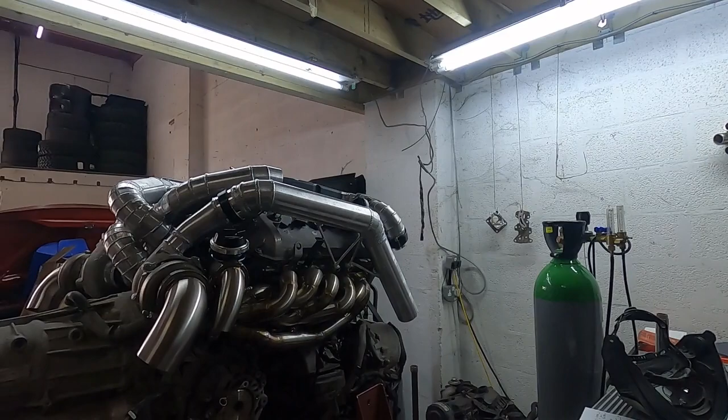This is how big this engine is. In reality, it is huge. It is W12, so it's shorter than the V12, but it's definitely larger. It's just big. Let me just show you from this perspective, maybe. Yeah, it's huge.

Right, so a bit more progress on the Econoline, and oh crap, where's the engine? Yes, it's not here anymore. However, now you can notice roughly how huge this hole is just to put that engine in. And I can tell you right now, this is the minimum. We are actually at the level you see where I cut the floor. It is actually the same level, same height as the chassis rails, and yeah, it barely fits.

This is how big that engine is. Let me show you. Let me just grab my coffee because it's morning and I kind of need it today.

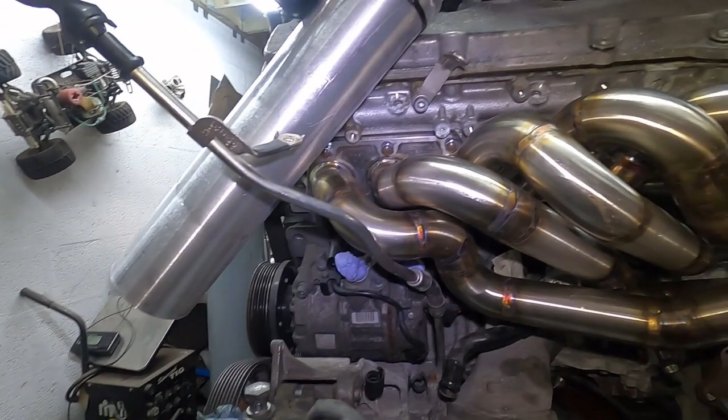Ta-da! It is pretty damn big. Obviously we have to work on the gearbox now. It's gonna be rear-wheel drive, blah blah blah, and yeah, this is how it looks from the outside. Now you can see obviously why all of these bends and all that stuff. This bend here is to allow that fitting over there for the air con compressor fitting, the big one and the small one. So everything now starts making sense.

Wires, twisty stuff, etc. Plus we have access to every single bolt there. You see, you can access them all. And yeah, this is how it looks. I took it out. Let me show you this side. It's a bit easier. This is obviously that cooler we have to remove because there was no space for it. And yeah, this is this marking.

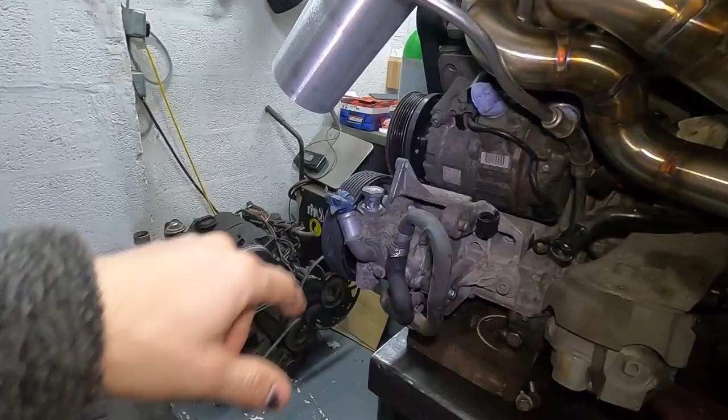It's actually my ramp, because I went, believe it or not, through this space, which was a bit tight. It's a bit of a mark here, a bit of a mark here, but apart from the mark, this is kind of wobbly now. But it went through. As soon as you remove the power steering pump, it went through by millimeters, not even that. So I did remove that. I marked the positions of this where they have to be, and I have to make mounts to support this in place so it doesn't move.

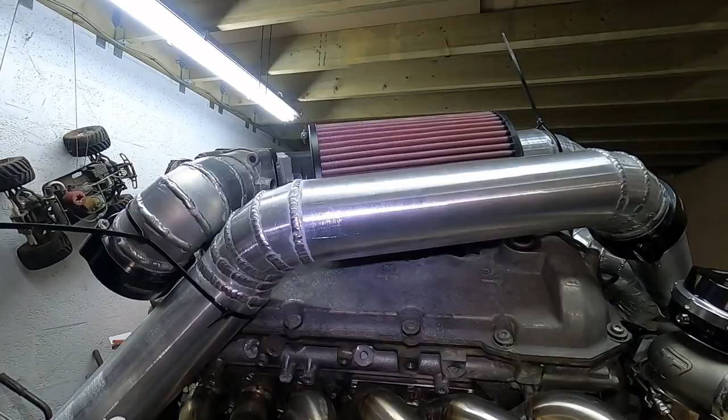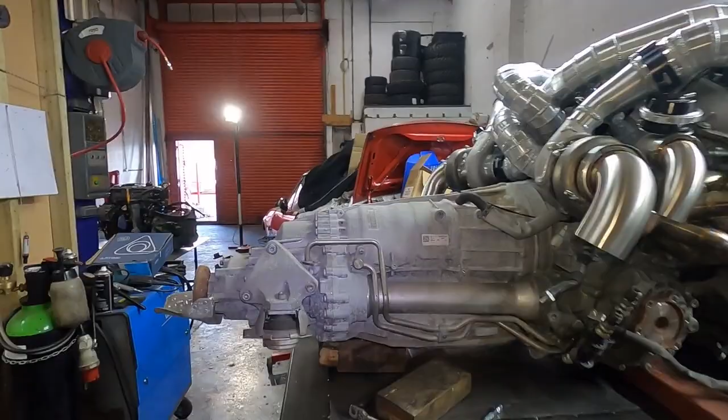But obviously I needed the engine close to the welding station I have over here, or bring my welding machines to the van, which turns out is gonna be almost the same job as bringing the engine here. Plus I need the engine outside anyway because I have to work on the transfer case. This van is not gonna be four-wheel drive, so I don't need the front differential, I don't need the front prop, I don't need the transfer case at all.

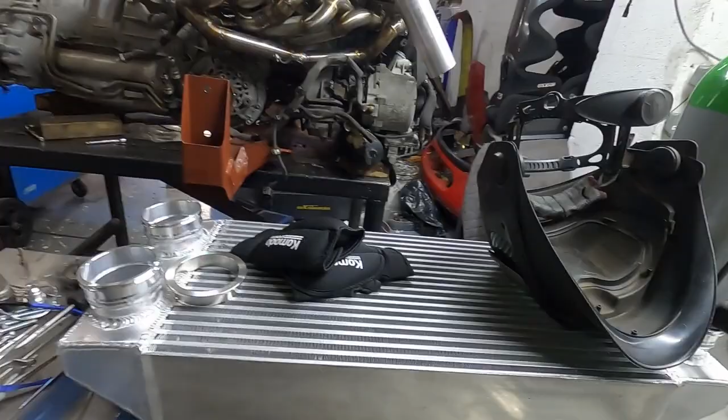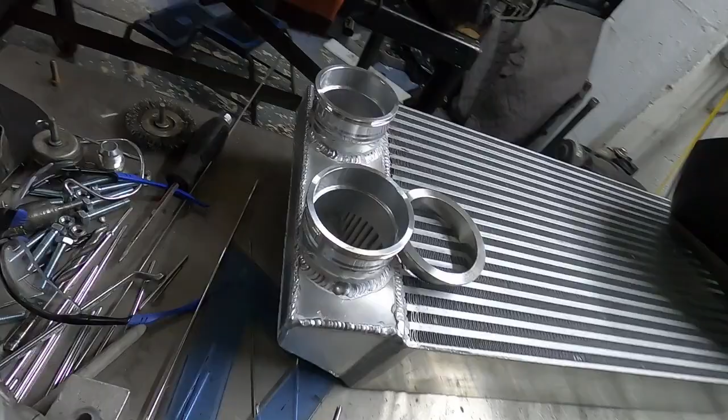Yeah, that's the intercooler, both sides. Well, that's my training parts for the boxing. Let's put them on the side because they're not needed here. The intercooler with the bars welded in, so we got better airflow, no restriction anymore. This is how it looks without. Hopefully you can see it. And this is how it looks with the bars inside.

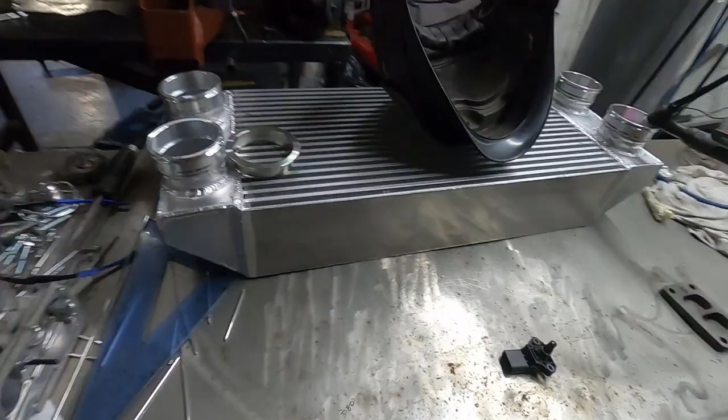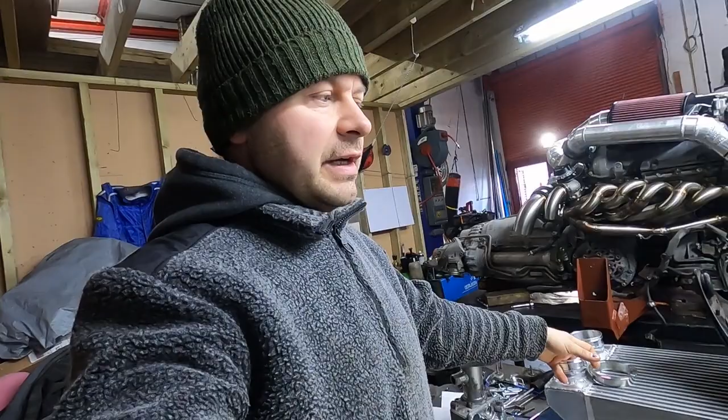Now I'm not gonna go into detail because I think I've done it before in a video, because I'm doing this content over 2 weeks. But if I didn't put those bars inside, there would be way more resistance for the air to go through these vanes, and a single intercooler, although this is huge, nearly 5-inch, would not be enough for that engine. And the only reason this is actually enough, I've calculated this, is just enough, is because we got those bars inside.

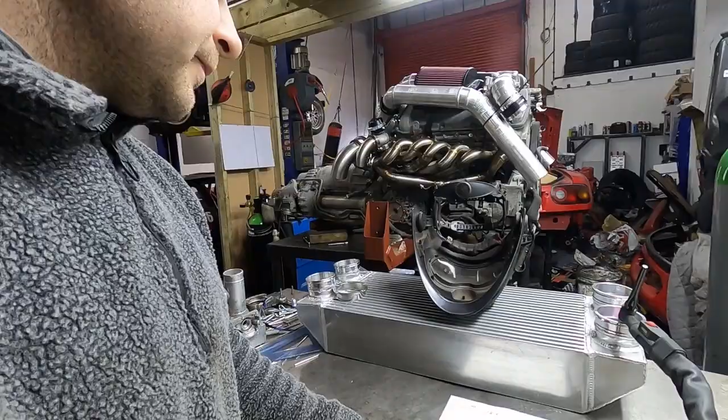And if you wonder if they make a difference, on the flat surface the resistance coefficient is 1.14. On the round it is 0.045, not 0.45, 0.045. In comparison, that's nothing. And then when you boost it at one bar, you got twice the amount of air and flow, and it's just amplifying those numbers. So as much as you amplify every restriction with the boost, if you have something that improves whatever you've done, with the boost you improve it even more. So bear that in mind.

Hey, I'm back. So this is how big this engine is. In reality, it is huge. It is W12, so it's shorter than the V12, but it's definitely larger. It's just big. Let me just show you from this perspective, maybe.

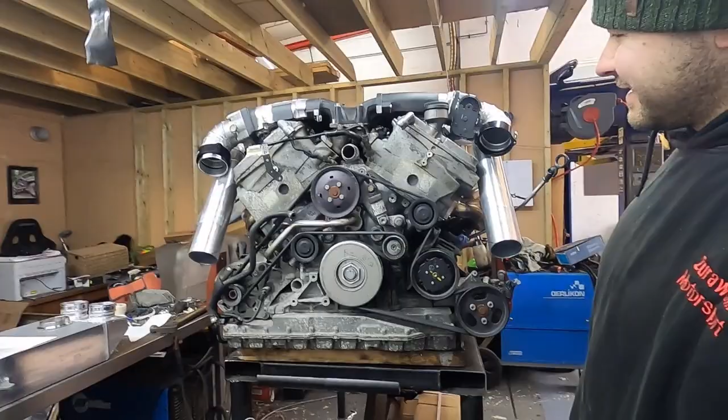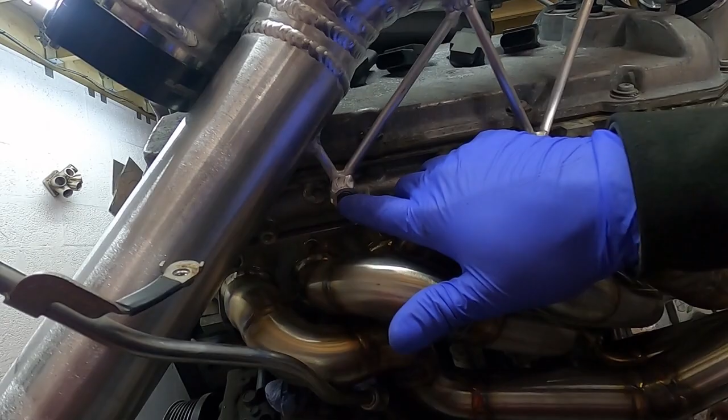Yeah, it's huge. Yeah, it's big. It's big. However, I've done the mounts on boost pipes, both of them. Well, these are the intake pipes, really, not boost pipes, and this one's as well here. These ones are machined, so the heads of the bolts drop inside, nothing sticks out. I don't know, it's a bit of a small touch, but I wanted it this way.

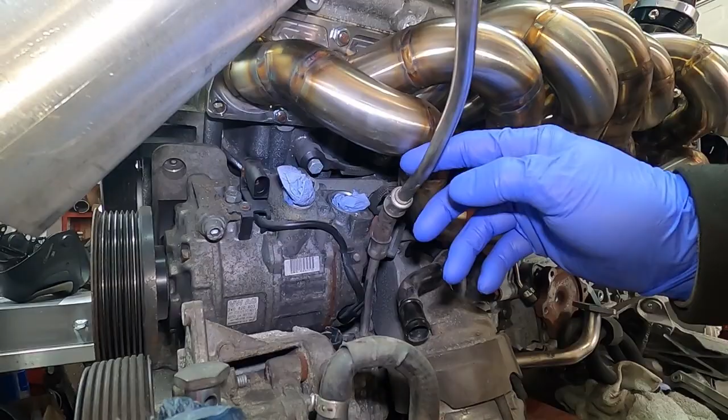Now you can tell why all these exhaust manifolds were all tricky and all bending. We want to retain the aircon compressor, for example, so this pipe had to go this way as it is now. You just put the light on, you can see it better, because we need a space for that fitting over there, and this one as well. So all of this now kind of makes sense.

Once the engine is out, you can actually see all the stuff, and once it was inside, I had to crawl underneath the floor, checking and making sure everything is right, what space we need, etc., and take the manifolds off again, put them on the bench, mock it up, then test it, make sure I mock it up the right way, and then bring it back over.

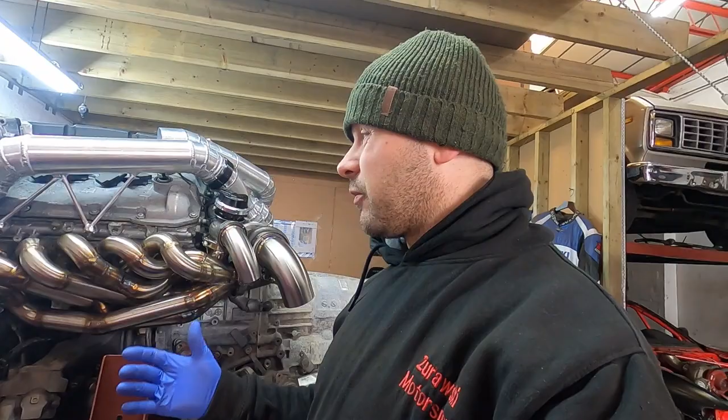It's like an endless job, and that's why this stuff sometimes is expensive, because it requires much more work than what people think. It's not just a couple of pipes welded together. You don't just weld the manifold, all right? You have to build it, and when you build it, there's lots of stuff you have to go around. You have to be careful. It can't be in the way. It can't be too close to the heads, or there's some sensor, or some plastic bits, and there's a lot of things to take into consideration.

Sure, once you make them in a production line, you have a jig, you make one after another, fine, that's a different story, because you made the one, and that's the biggest effort, and you just reproduce them. But when the stuff is one-off, it's a completely different story, especially in something like this.

Okay, so this is finished. You've seen all the stuff. Well, not really finished, because we still need oil feeds for the turbo, which is these ones. The core has to be twisted. These plugs are for the water cooling. Not really sure if we're gonna run water cooling on this system or not. Usually we don't do it. In this one, we have to make a decision. The oil return lines we still obviously have to build. Plenty of stuff to do.

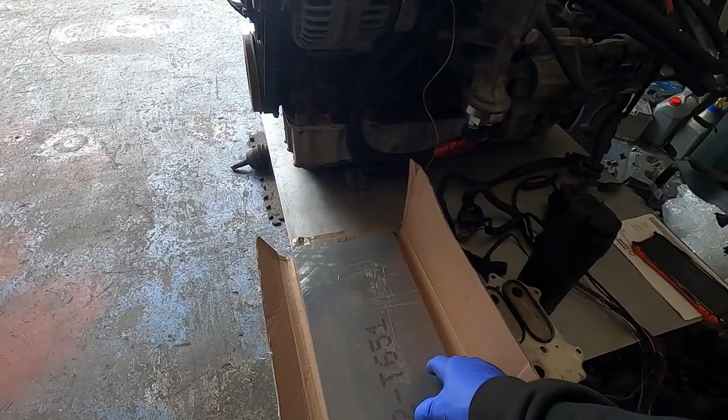The adapter plate for the oil cooler that was there. Well, the oil and water heat exchanger, which we had to remove, obviously, to give us space for the exhaust manifold and all the stuff. I'll actually show you, this is here. You probably remember this from one of the first videos. This is the one we removed, yeah. And this is the plate we're going to replace it with. Well, I have to build this one, but that's what we're starting with.

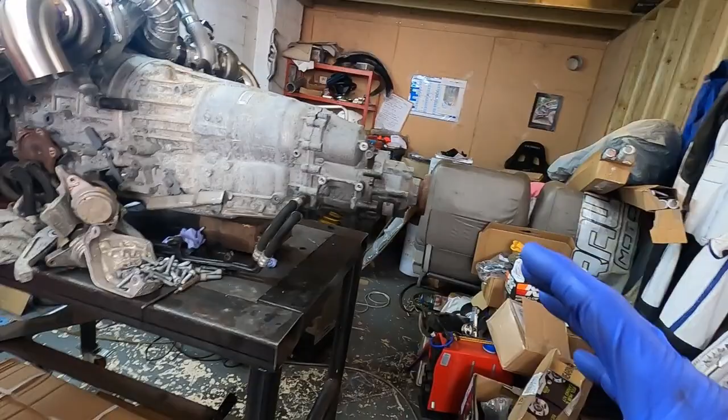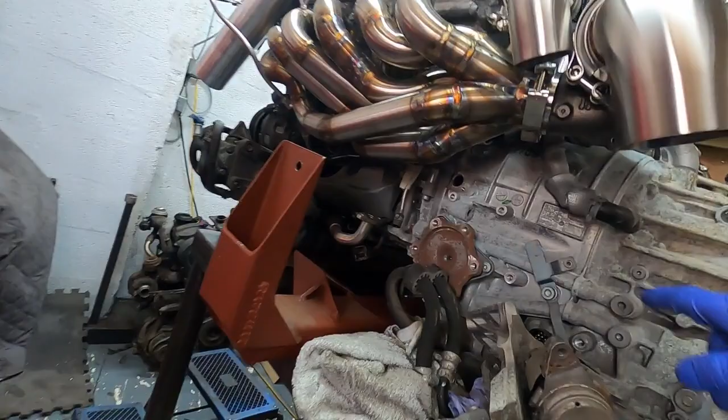However, today the biggest thing is that we're working on the transmission, because again the gearbox was a big question mark, because this is not a rear-wheel drive gearbox. This is a quattro gearbox, the big quattro gearbox. You've got the small ones, you've got the big ones. The auto ones are ZF. This is 6HP28 on the plate, but on the casting it actually says, let me show you, 6HP26A instead of 28.

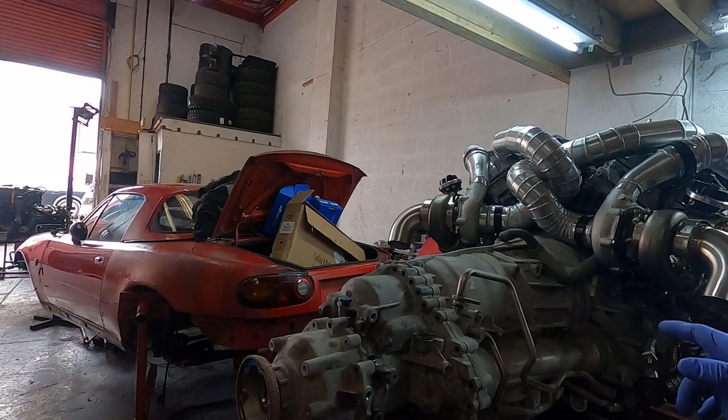The 28s come in BMW, Jag, X5, but the 6HP26 gearboxes all come as all-wheel drive, like this style gearbox, which is Audi 4.2 liter, all the quattro big engines. And I like the construction of them. I think they're strong, I think they're good, and all this stuff.

However, there's a catch, and it's a big one, and actually it's a big issue for us, because the Econoline has a solid axle on the back, right? That's the one over there. You probably can't see it. I'm gonna show you that in a minute, because I'm gonna have to explain a couple of things. Why is that an issue?

We sort of knew it before, but we kept saying let's leave this for later, we don't have to think about this right now. But now the time comes to actually do it.

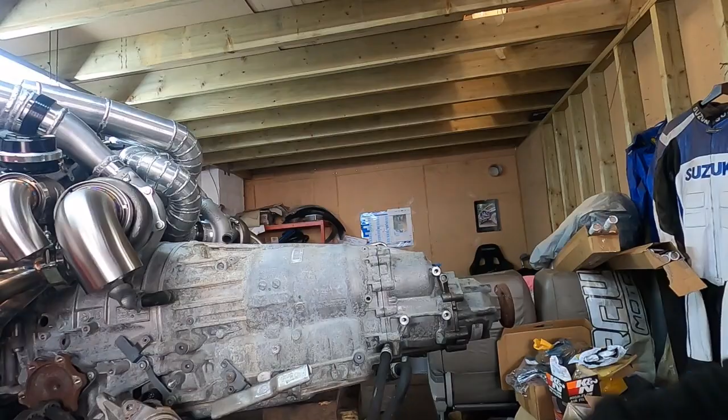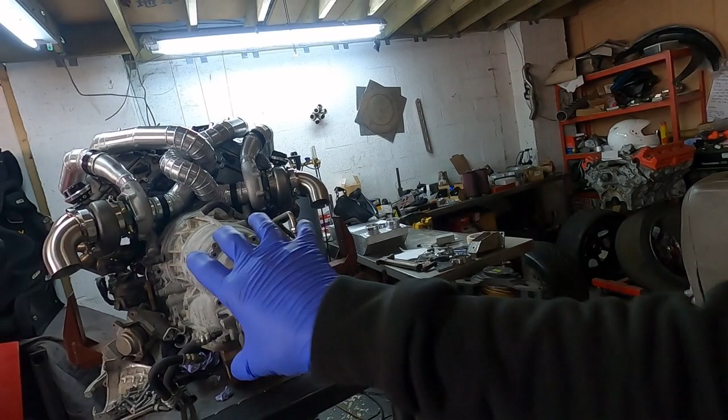If you pay attention, this is the main gearbox. This is auto. The auto gearbox works on pretty much one shaft, split obviously in gears, but one output shaft. Rotation of the engine, if you see it from behind, is anti-clockwise. And the flanges, the output flanges from the gearboxes, are anti-clockwise. So if you see the diff from behind, it has to turn anti-clockwise to go forward. You with me? Pretty simple, right?

But the output flange on this one isn't on that shaft, it's on the bottom, because this is a transfer case. So we have the internal differential which splits the torque, the power, the motion between the rear axle - this flange goes to the rear diff, and the flange or prop shaft goes to the front diff, okay?

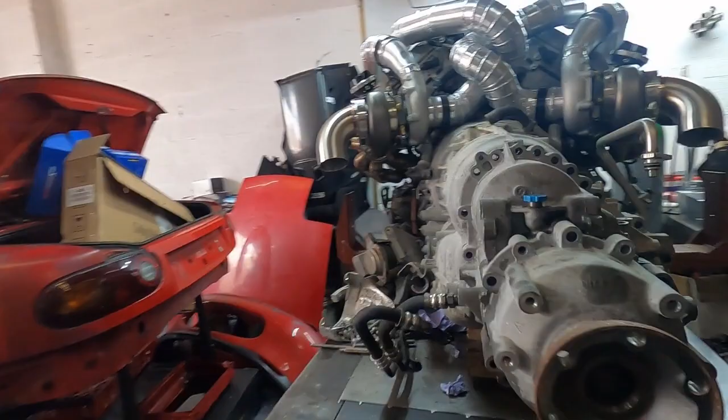Now, this transfer case is not a traditional one. Usually transfer cases, if gear driven, have 3 gears. If chain driven, they have 2 gears. I'm talking about the main gears, not the low and high gears in transfer cases. That's 4x4. This is all-wheel drive. Big difference.

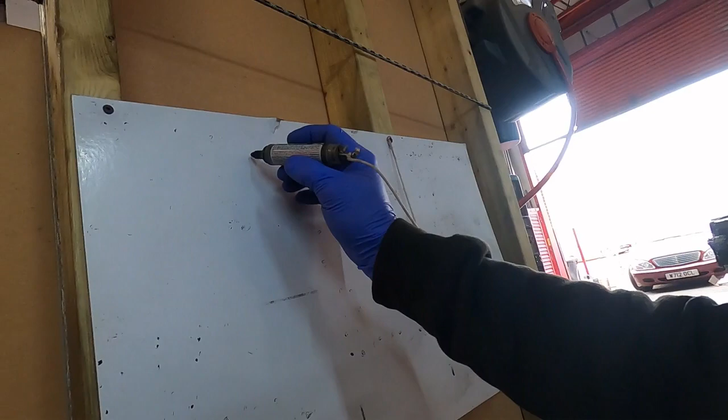Let me show you something. If you have 3 gears - 1, 2, and 3 - usually it's something like this, like Land Rover's LT230 series transfer cases. Fairly strong internally, gear driven, pretty good.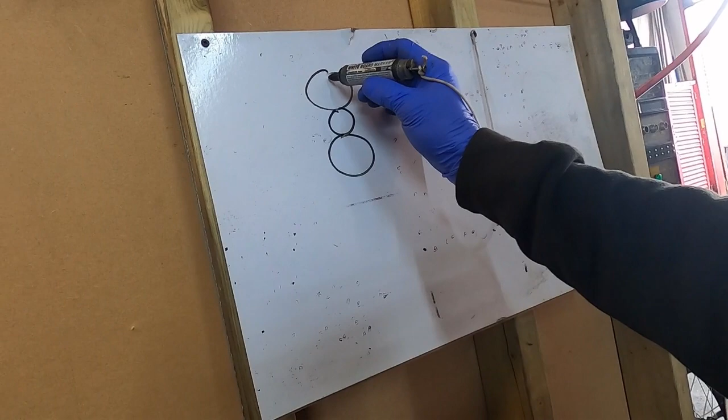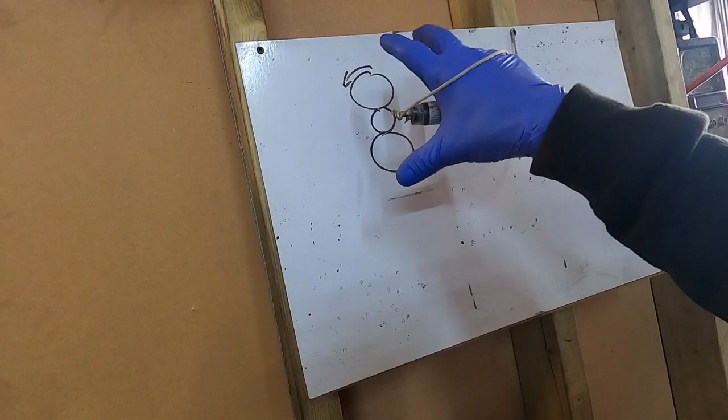So the flange on the top, which is direct from the gearbox, spins anti-clockwise as the motion of the engine, the rotation of the engine - and I'm talking looking from behind it. If you're looking from the front it will be clockwise, but we're looking from behind for simplicity of explanation.

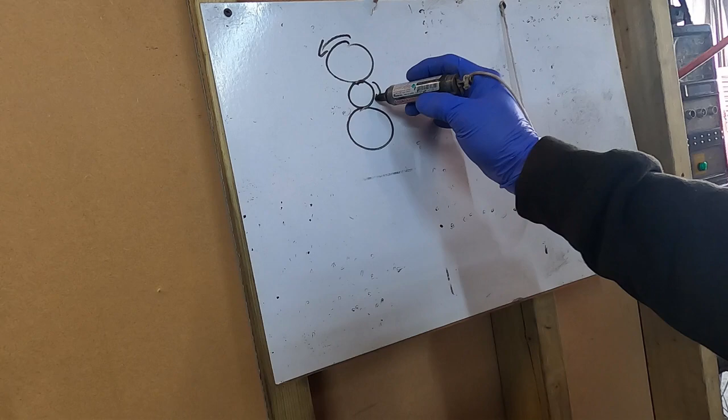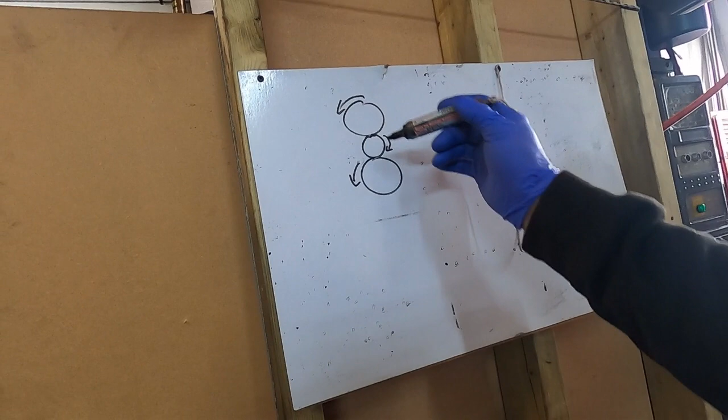So if this gear drives anti-clockwise, in consequence this will drive clockwise, and this one will drive anti-clockwise. It's very easy to follow the motion - go this way, and go this way. Very simple, 3 gears. So even if you have the reduction or the transfer case, the top gear spins exactly the same as the bottom gear because you have one in the middle.

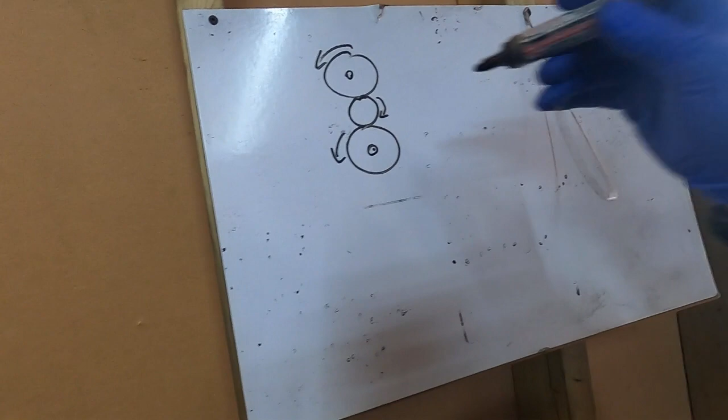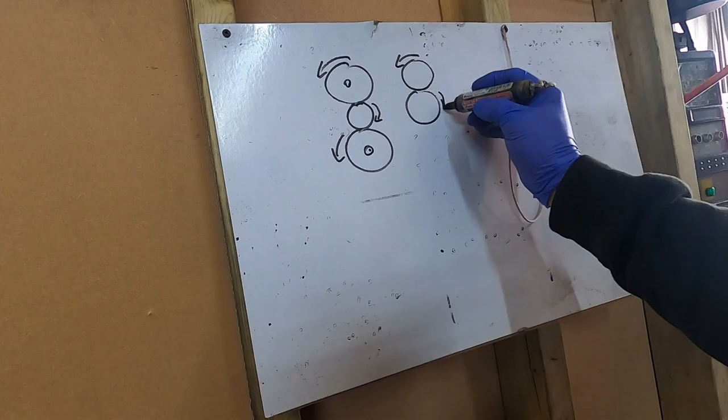But pay attention, in our case we only have 2 of them. So what happens is like this: this goes anti-clockwise and this goes clockwise. What that means, very simply, is we have 6 gears in reverse and 1 forward.

Okay, so this seems like a problem, but again it really isn't. Well, it is, but it isn't, because when you build stuff - like I do fabrication - you're constantly sorting out problems. You're building stuff that doesn't exist, you're finding solutions to the problems. It's all one big problem. I don't even call them problems, it's just a job, it's work that you have to do. Okay, we want this, I want it to work differently - you can call it a problem. Can you sort it out for me? Yes, I can sort it out.

Again, we kind of knew this before. I wasn't sure how this transfer case was working. Now I know, that's it. And it will not work in this van with this axle, which is a bit of a shame.

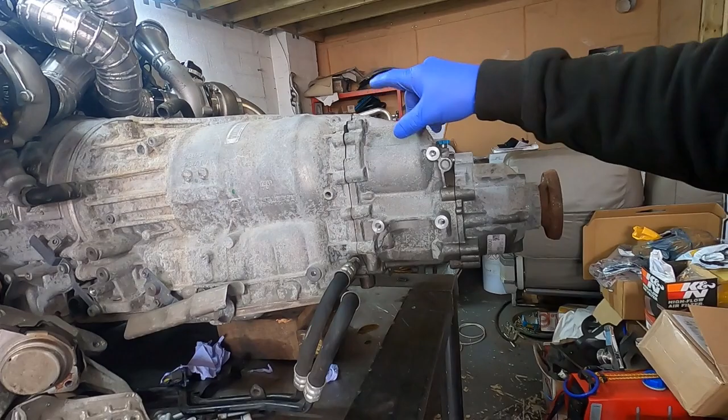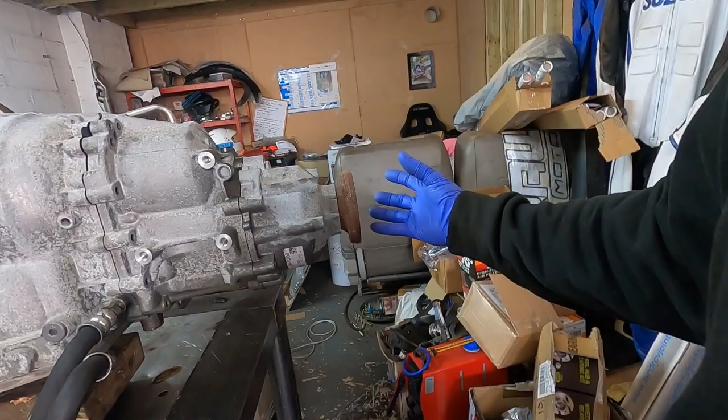Now, my idea at the beginning was to open the transfer case, which I'm gonna do in a minute, and make a plate like this one, and use the primary output shaft from the gearbox directly, and make an adapter to put this flange or a different one directly here. So I'm gonna just transform this gearbox back to rear-wheel drive only.

Like, okay, but how did it work? How does it look like? I was like, you know what, it's hard to explain - and this was my mistake, right? I was like, oh, I'll show you, because I have my RC car, I'll show you how it works. That's why I got this outside.

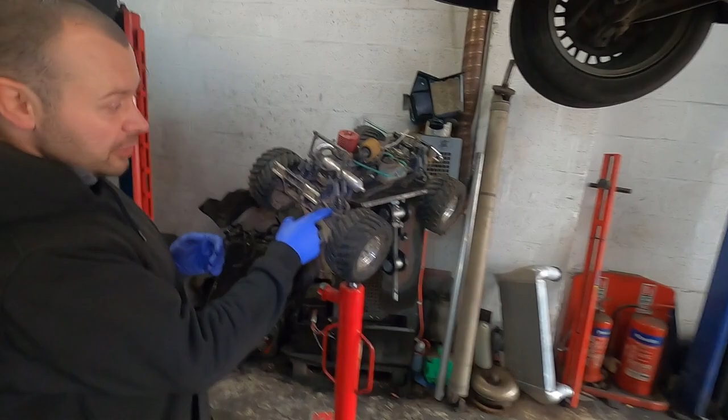So this is independent suspension - you got upper arm, lower arm, shocks in between, and they go up and down. Then I showed him the pictures of the Ultra 4 buggies. But to be honest, I can't even explain how crazy and quickly this escalated. I should have had my camera yesterday to show it, because it was like a comedy show. Honestly, I was showing him how the suspension works, and he wasn't even listening - it was like, whoa, that's cool, can I have that?